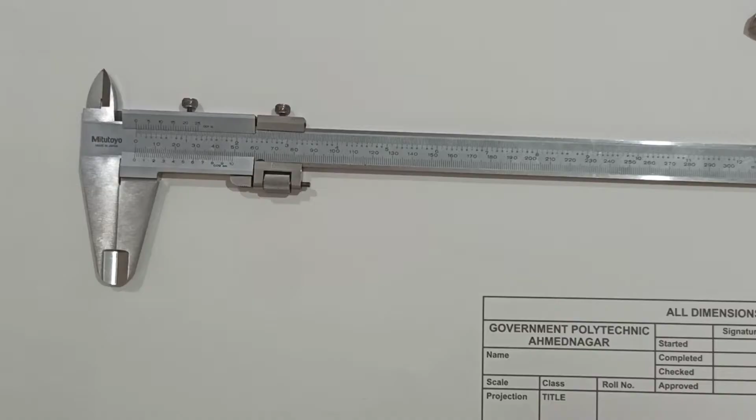By using this vernier caliper, we have to measure the thickness of this type of bearing. So we have to measure the ring thickness of this bearing.

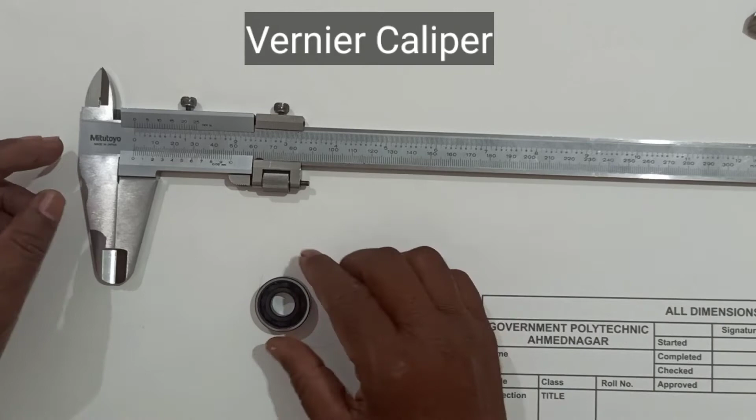Before handling or before measurement, this component should be clean, as well as this measuring instrument also clean. Then first check this vernier caliper for zero error.

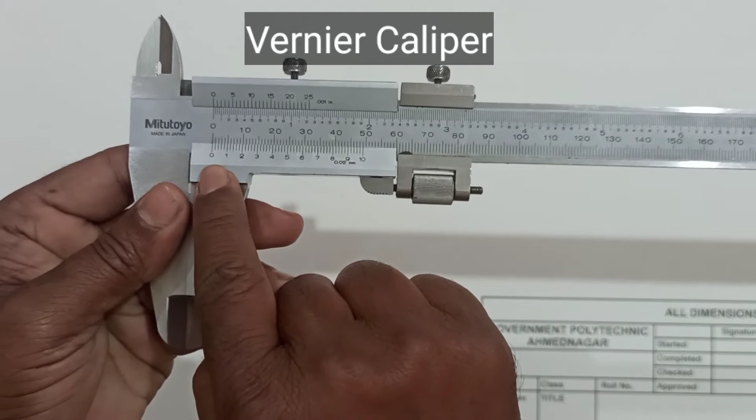Here we have to observe that this zero mark on the vernier scale and zero mark on the main scale should coincide with each other.

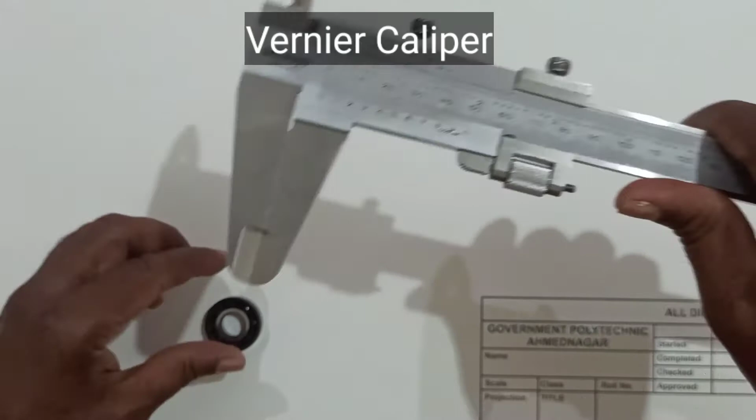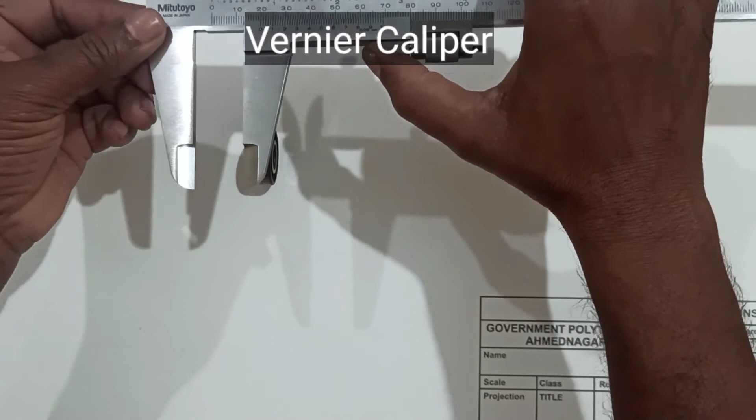Then place this component on a flat surface. Then by using this knob, just push this vernier scale.

So hold the component in these jaws, then lock this nut as well as lock this nut.

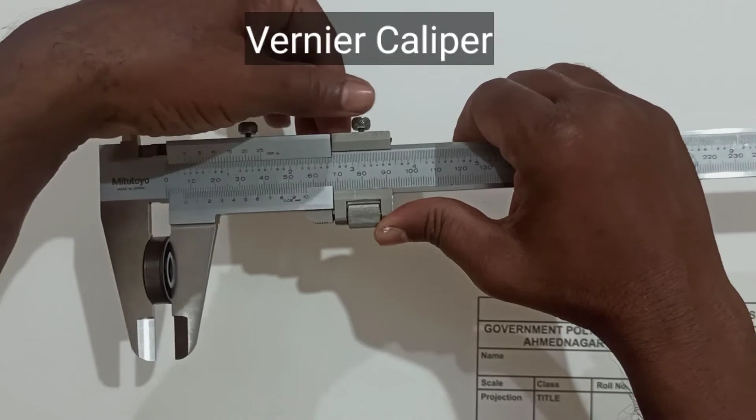Reading: measure the distance between 0 on the main scale and 0 on the vernier scale.

As the marking is in terms of millimeter, we have to use this scale which is marked in millimeter. So this 0 is in between 5, 6, 7.

And 8 and 9. This 0 just crosses the 8 millimeter division. So the main scale reading is 8 millimeter.

Now as this 0 just crosses the 8 millimeter line, we have to consider only this portion, of which the division of the vernier scale will coincide with the main scale.

If we see this division, the division number 1, 2, 3, and 4 - the fourth division coincides with this division

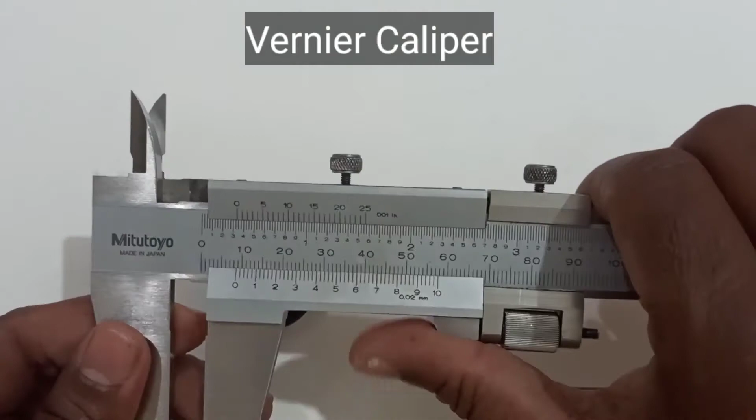Again hold the component, then note down the readings.

So the main scale reading is 8 millimeter. And here now the fifth division coincides with the

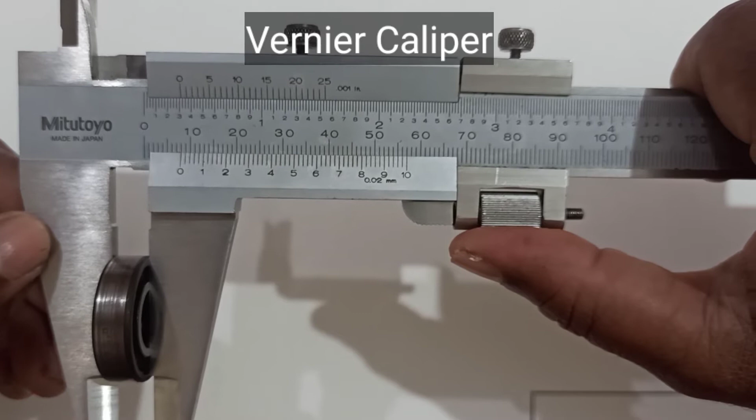main scale division. So the fifth division of the vernier scale coincides with the main scale division.

So total divisions are up to this point, meaning 5 divisions are here. So the fifth division will coincide with the main scale reading.

So 5 multiplied by 0.02 gives us 0.1. So the total reading is 8.1 millimeter.

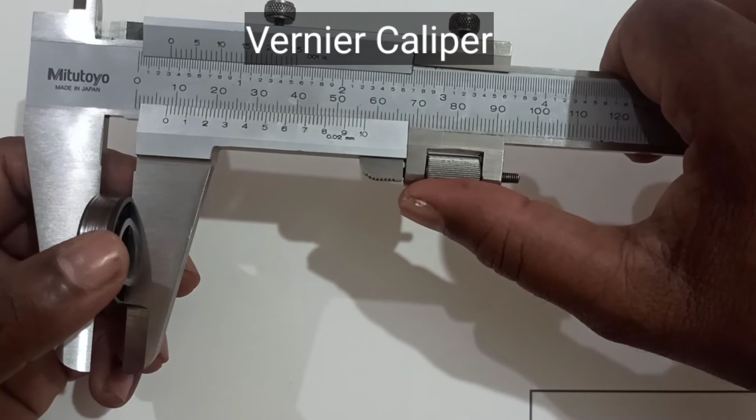The previous reading was 8.08. Now this is 8.1. Now take another, a third reading.

Eight millimeter is the main scale reading. And here the third division coincides with the main scale reading.

So 3 multiplied by 0.02 gives us 0.06. So the total reading is 8.06 millimeter.

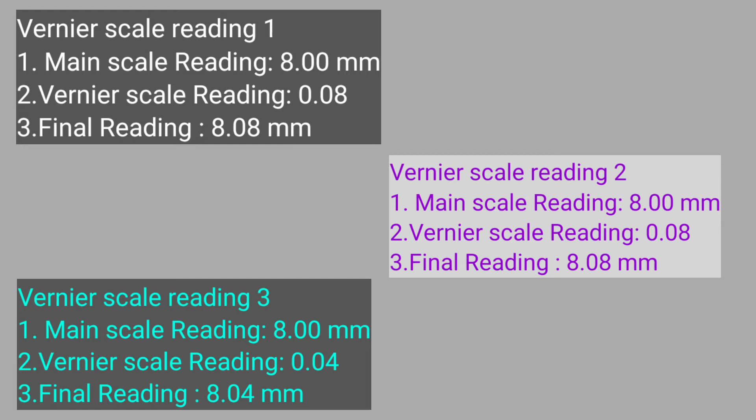Now this is a digital vernier caliper. Here we can directly get the result in digital form without doing any calculations.

All features are the same except the digital display is provided in this digital vernier caliper.

Now we have to check the zero error in this case. Then press 0. Now it shows 0 millimeter reading, meaning it is correct. Now it is ready for measurement.

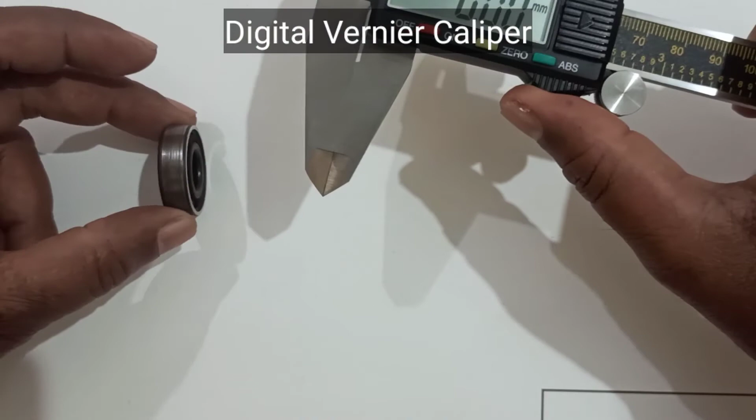Now take the same component which we already used, place the component here, and hold the component in this way, lock this nut.

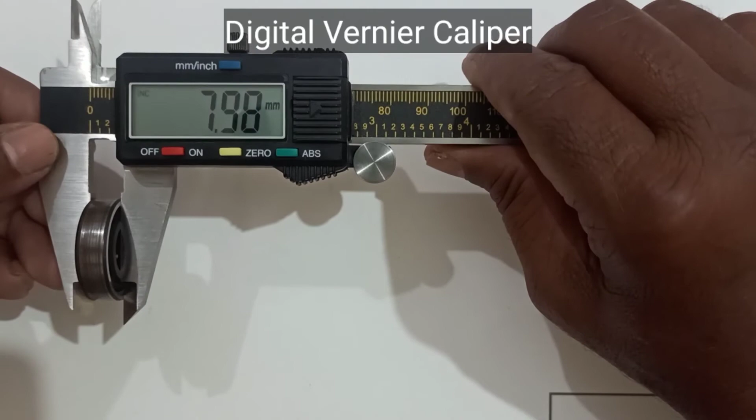Now this shows the reading of 7.98 millimeter. Again, the second reading shows 7.98 millimeter.

And the third reading is 7.99 millimeter. Thus by using the digital vernier caliper we are getting the reading very speedily.

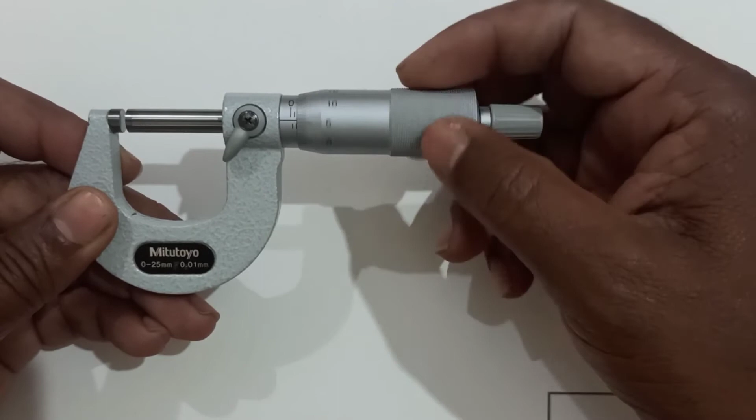Now the next component is a micrometer. So the micrometer is shown here. This is capable of measuring only up to 0 to 25 millimeter, and its least count is

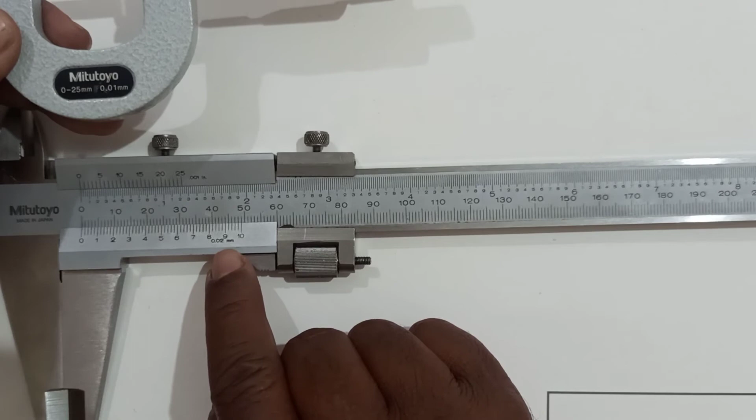0.01 millimeter. For the vernier caliper the least count is 0.02 millimeter, and for this it is 0.01 millimeter.

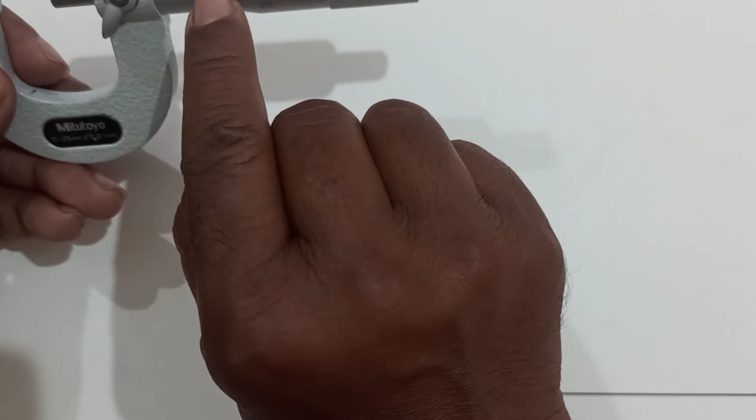This is a circular scale. This is a main scale. On the main scale this is a horizontal reference line, with reference to which we have to take the main scale reading.

On the main scale the marking is in terms of millimeter, meaning 0, 1, 2, 3, 4, 5 millimeter, 10, 15, and if

we proceed, as the range is 25 millimeter, the final division will be 25 millimeter.

Now hold the component here.

The component is held in the micrometer. Now we have to take the reading. First take the main scale reading and then take this circular scale reading.

Now the main scale reading shows us, now the edge of this sleeve - note down the position of the edge of this sleeve.

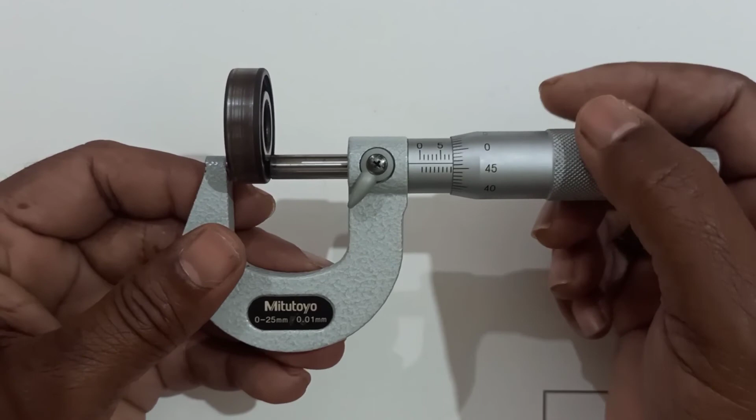7.96 millimeter. So the final reading of thickness of this component is 7.96 millimeter. Now change the position.

As it is of constant thickness, apply light pressure by using this ratchet. Now again take the reading.

6, 7 is completed, it is just ahead of the 8th division. Again it crosses the 7.5.

So 7.5 is the main scale reading, and again here we see the 46th division is the circular scale reading, so 7.5 plus

46, 0.46 millimeter is the circular scale reading. So the total reading is 7.96 millimeter.

So for the third reading, again it is observed that the same reading is observed. 7.5 is the main scale reading, and the 46th division is coinciding with the reference line.